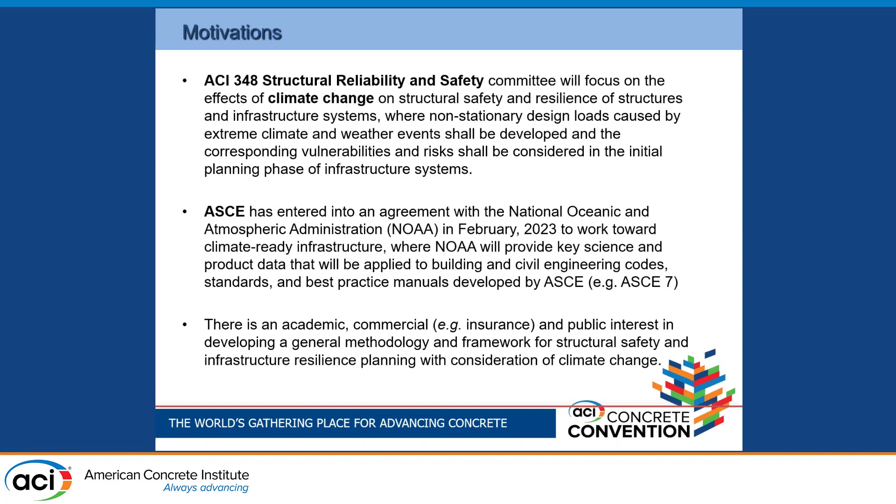Another thing I just mentioned is ASCE, American Society of Civil Engineers. Just last month, February 2023, they signed an agreement with NOAA to work toward climate-ready infrastructure, where NOAA will provide their data. So in the new version, ASCE 7 or other manuals will consider climate change. Currently, we do not have anything in the design code. Finally, there's a lot of interest in climate change and infrastructure resilience planning due to climate change. Basically, there's a lot of research funding, we chase that money, and we start from there.

So today's presentation: first, we talk about the coastal concrete structure, what we are talking about for my project, basically for the Navy. Also the damage of concrete structures by extreme weather, there's one slide. And we'll focus on the extreme design load in ASCE 7, basically the wind load, storm, and flooding. For structure-wise, we talk about the flow velocity because that will cause the damage of your structure. Sea level rise, of course, has been studied a long time. And then we talk about in the design code how we model the PDF, probability density function, and the load combination, with a very general idea. I'm not going to do the more detailed study.

And then the non-stationary climate change, because non-stationary means the historical data cannot be directly applied for future prediction, because with climate change, everything changes. And finally, I have two more slides on resilience and risk mitigation, and the summary, and one slide on the future need.

Okay, coastal concrete structures. We'll talk about buildings first; everybody works on buildings. And the parking lot and the road are infrastructure, network, or whatever. More particularly, for the U.S. Navy, we talk about piers and dry docks. It's a very important facility for us for the maintenance of aircraft carriers or submarines. So we are running into some issues. We are short of facilities.

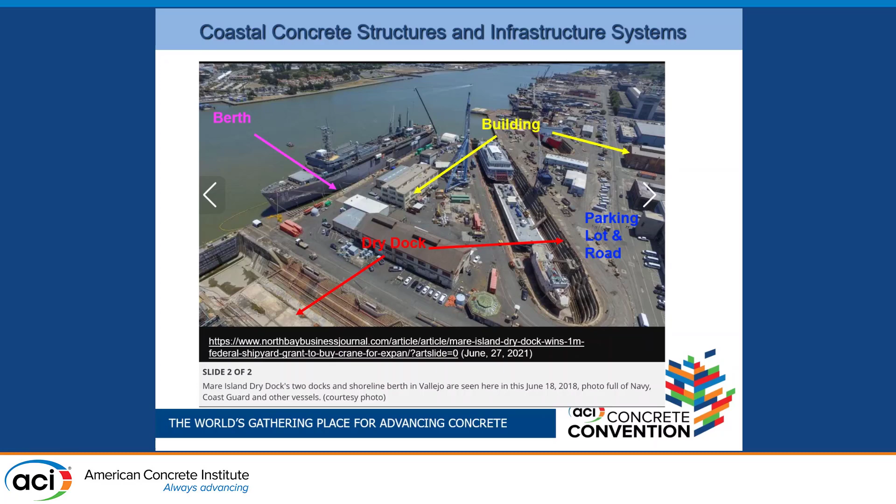I put the red mark, extreme water level. This is a very important design factor. And for our pier design or even the dry dock design, there's a specification. This is subject to climate change because it includes the tide, storm surge, and sea level rise. All the numbers will be included. This will be the focus of my research, to see how it's specified in the design code and what the current practice is.

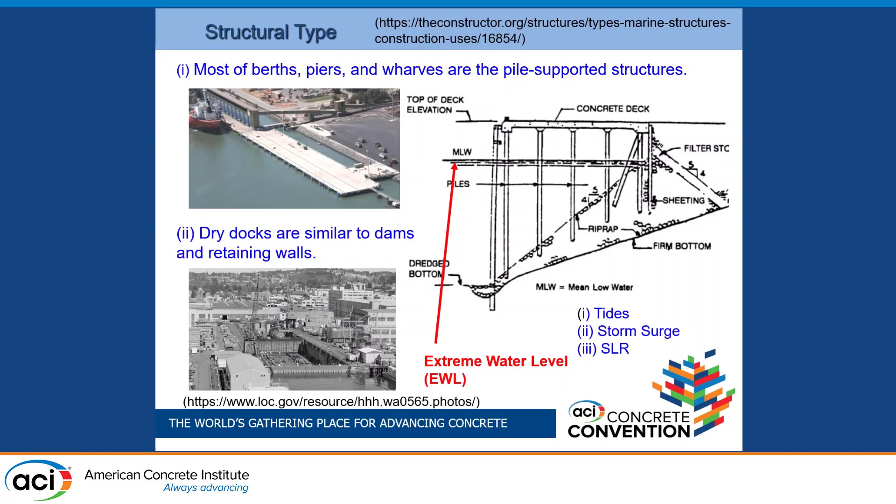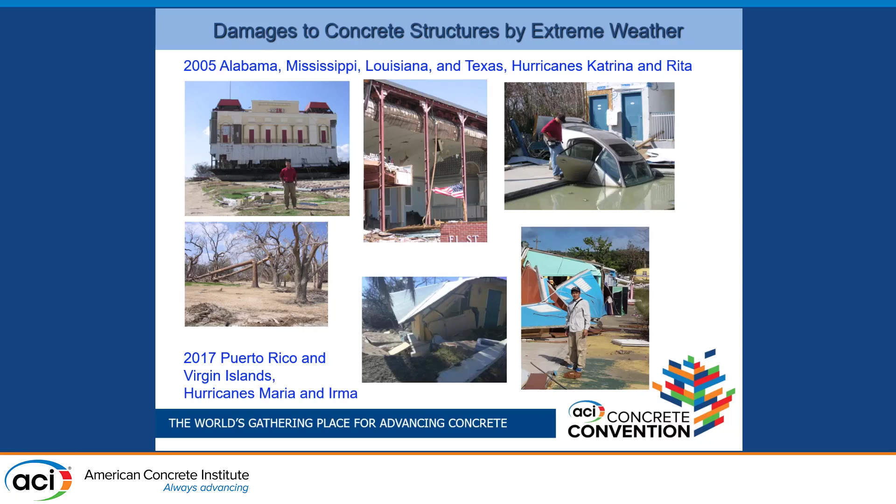Damage of concrete by extreme weather. You can find this online everywhere, thousands of photos, but you couldn't find these six because we took them ourselves. In 2005, almost 20 years ago, I was in Hurricane Katrina. I was there, that's the first one. And we have first-hand experience of how the hurricane damages structures along the coast, restaurants and residential or other apartment buildings. And in 2017, my co-author, Professor Yue Li, also went to Puerto Rico and did a survey of those damages. We're not going to go into detail on this one.

Right now, when you look at the coastal area, many people develop the probability of hurricane damage curve. You see the vertical is probability of damage, and the horizontal is the wind load. Basically, what's the maximum extreme wind load you have. Then you define your damage level. The first one will be minor damage, the black one, and the pink one will be medium.

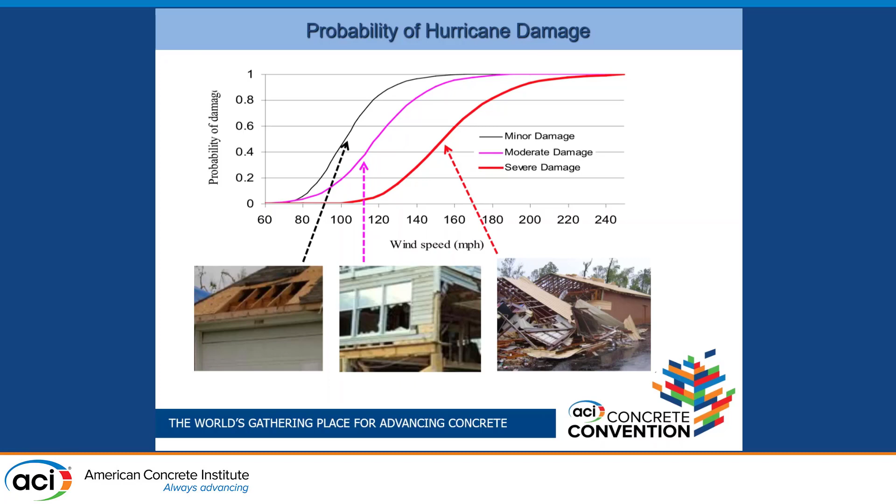It depends on your definition of a curve. For example, if your wind load, the max extreme wind load, is less than 60 to 80 miles per hour, you really don't have much damage, don't worry about that. If you're over like 160 miles, you probably get some damage. The degree of damage depends on the condition. Like Florida, the hurricane season is always around 140-180, that's a range. So we're not going to detail this.

We'll focus on the effect of climate change on structural performance. So what's the general temperature effect? Because we have buildings, you have expansion, the whole thing deforms, because extreme hot temperature in the summer and cold temperature in the winter, like in Alaska, will affect the deformation of your buildings. And the wind load, of course, that's the wind load and the hurricane, storm surge, that's blue.

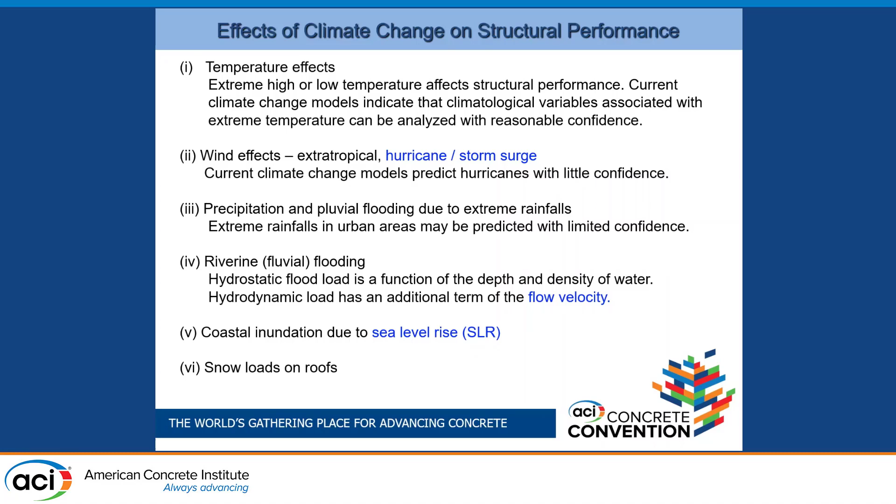Finally, as mentioned, the sea level rise and the snow load, this in particular in North Alaska, Northeast America, there's a lot of study by the U.S. Army Corps of Engineers, to see how those data support the future. Particularly, we'll talk about the climate change on the coastal concrete area that I mentioned, the piers and the wharf or the dry dock. First, there's the effect of climate change over two parts.

First, how does climate change affect your design load for piers? The sea level rise, give you an example, because we have piers at a fixed elevation. If water level goes up, you have the vessel. The vessel has a cable, we call it the mooring system, tied with the piers, the bollard. Did you see that? So the load transfers, because the vessel is moving, if you're in a hurricane, it moves much more. And so sea level rise gives the angle the difference.

They will change the loading condition. That's one. Increased wind and wave load, that of course is affected by climate change. And now the question is, right now ASCE 7 has a chapter to talk about tsunami. So if we design for tsunami, is it really satisfied with storm surge, because we don't assume this is happening at the same time, right? We design for that, just like we design for earthquake, it's good for the tsunami. So this is a question we need to answer, and in the design code, we do not have an answer yet.

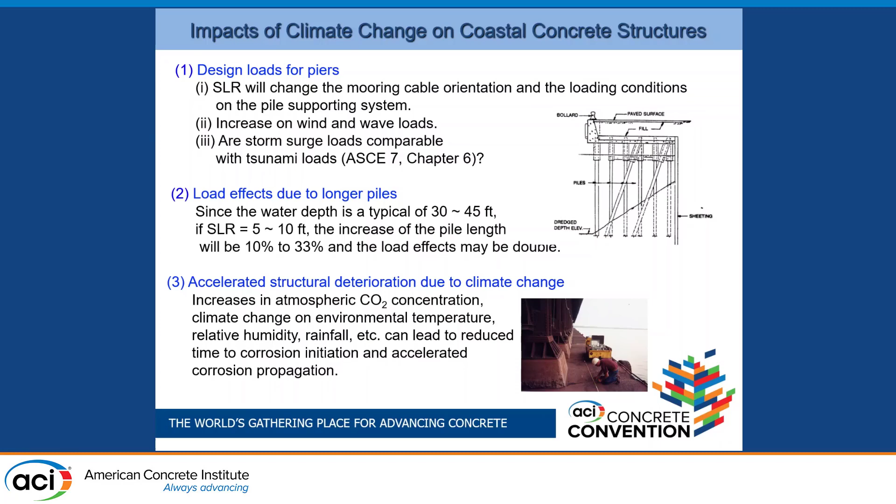So this briefly covers that. And now we focus on three parameters: wind and flow. Today's presentation is just wind and sea level rise. I didn't do the flow velocity because of time limit.

This is very similar if you have a structural engineer background. The left-hand side shows how you calculate the wind load, and all the parameters there. On the right-hand column, the extreme value one distribution, you're probably not familiar with that. That's behind the scenes, behind the maximum 50 years load, the mean value ratio coefficient, that's what we're looking for. The wind load statistical number is whatever parameter in your equation, we all look at the mean value and standard deviation.

So in the ACI 348 committee, we have a structural reliability background. We've been doing that for 20, 30 years. And that's all our work. Our end product comes out to the load combination, 1.2 dead load, 1.6 live load.

Most people don't understand where the 1.6 load factor for wind load comes from, and they misunderstand it. People say their wind load is much larger than the nominal, but it's not the same concept. That's why I want to clarify this, for general information.

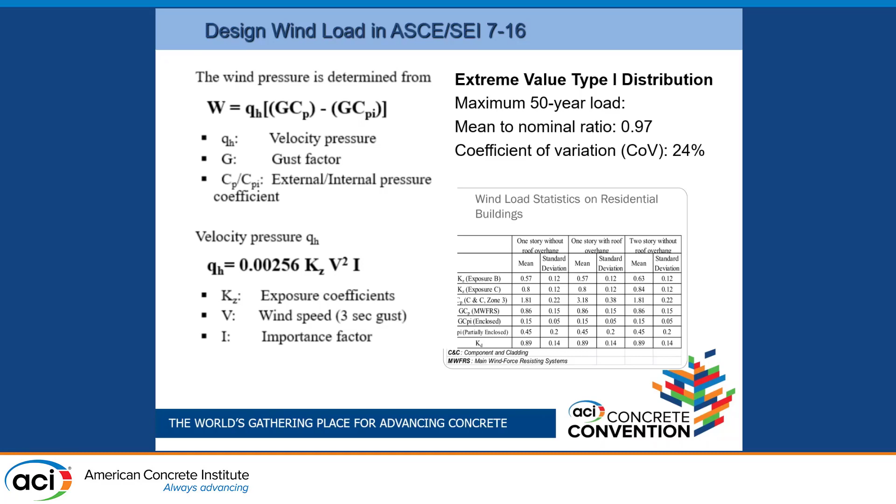This is the design note for each parameter. We have different data sets, different numbers from, look at the bottom, Australian building codes and other references. Different countries, even ASCE 7, we did calibration with ACI 318. This building code was calibrated by Professor Andrzej Nowak, who is in my committee and around here, back in 2003, about 20 years ago.

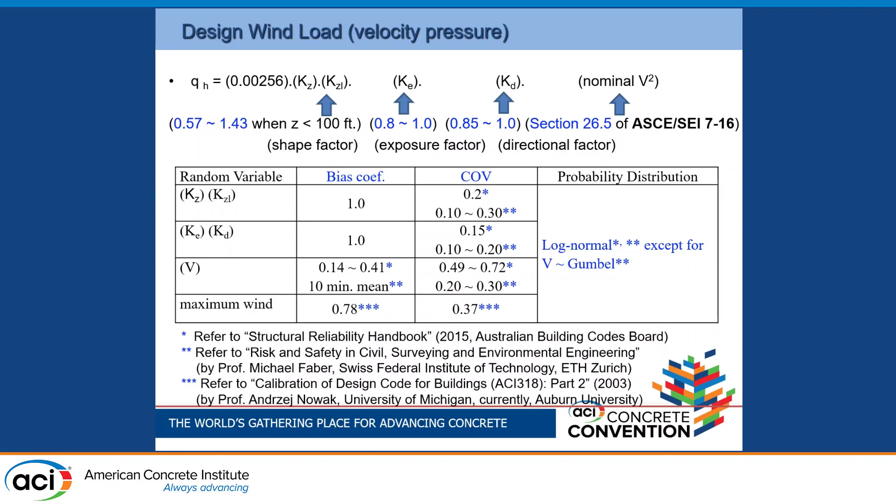So we do have the calibration for this loading, and we can do the order for the extreme loading part. This is just general, what we have today. Later on we'll talk about non-stationary conditions, what we're going to do for the future.

Now, extreme water level is very important. This includes tide, storm surge, and sea level rise. For tide data, we have NOAA - that's why ASCE teamed up with NOAA. They have years of data, and we try to use that data to figure out what the future weather will look like.

Storm surge has very large variation. These things may dominate your final result, but the uncertainty isn't happening every day - it's just a very extreme event. That's what we'll talk about.

And sea level rise, that's what we'll talk about next. We have different data from the IPCC code, the Intergovernmental Panel on Climate Change. They made 5 scenarios, which are good for controlling carbon emissions, and very typical when you do climate change modeling.

In those scenarios, you have global sea level rise ranging from 0.2 to 2 meters by the year 2100 - that's 90, 80 years from now, but they started in 1992. It's a huge variation. Once again, this is global - it's not applied to anywhere specific, it's just some model's global output.

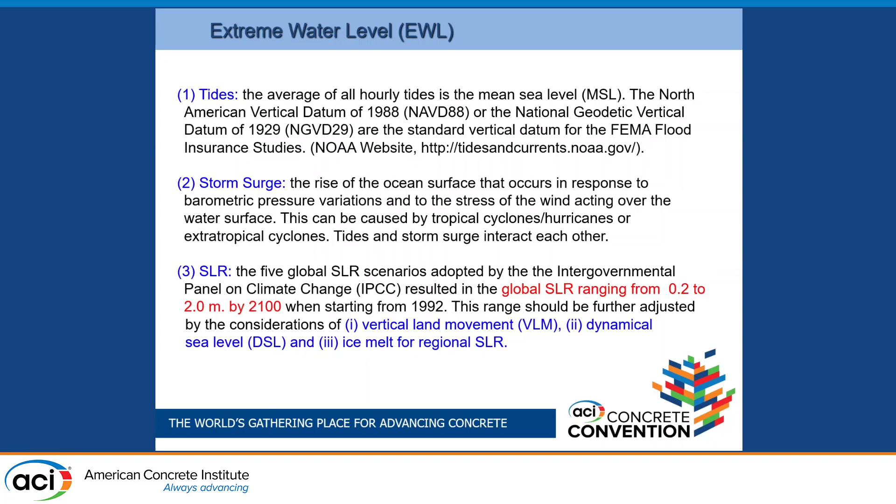U.S. Army Corps of Engineers has an online tool - I highlight this one. You can put in your location and they will tell you the sea level rise for that area. There's a lot of research behind that.

Now in practice, the UFC, Unified Facility Criteria used by the U.S. military, is similar to IBC code. In the National Building Code, we have a copy, but this code only applies to DoD standards. In UFC code, very simply, there are 2 methodologies. The first one, on the left-hand side, is where you see some level added - 2 or 3 feet, depending on the location. This is a super simplified level. How accurate it is, we don't know.

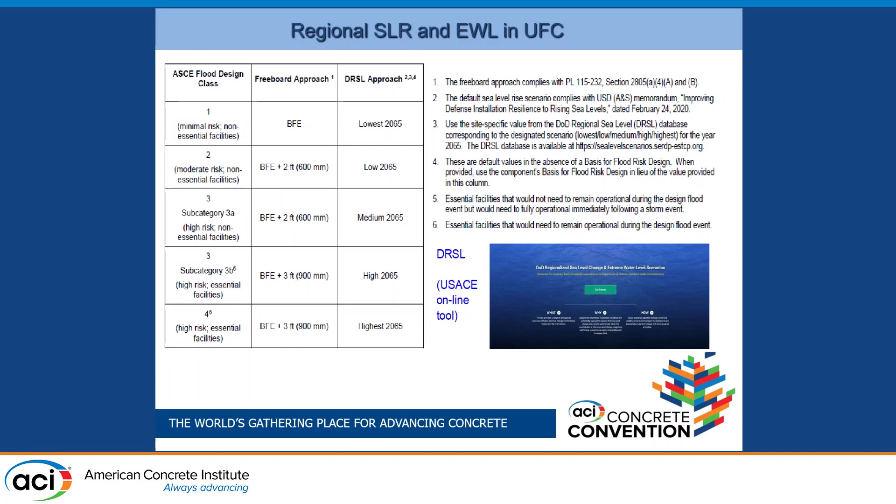Once again, I see the 2 meters is global - it's not going to apply everywhere. This regional aspect is very important because, for example, we have a shipyard on some island. In this island, the situation is different than the FEMA flood map, because all the assumptions are different.

So for the same island, another study - done by other people, not me - is the yellow one, YK-001, you see at the bottom. That covers 2 locations with the FEMA map. But we did additional points, T1 to T6, and came up with different numbers. We reported this to FEMA in 2017 and got approval. So in that location, particularly the shipyard, we can use those lower or different numbers.

So the bottom line is don't just take any number from the FEMA map. Of course, for simplification, you can take it, just like a seismic map. But for a particular case, if you want to do better for some reason, you have to do the additional work. Regional effect is really, really important.

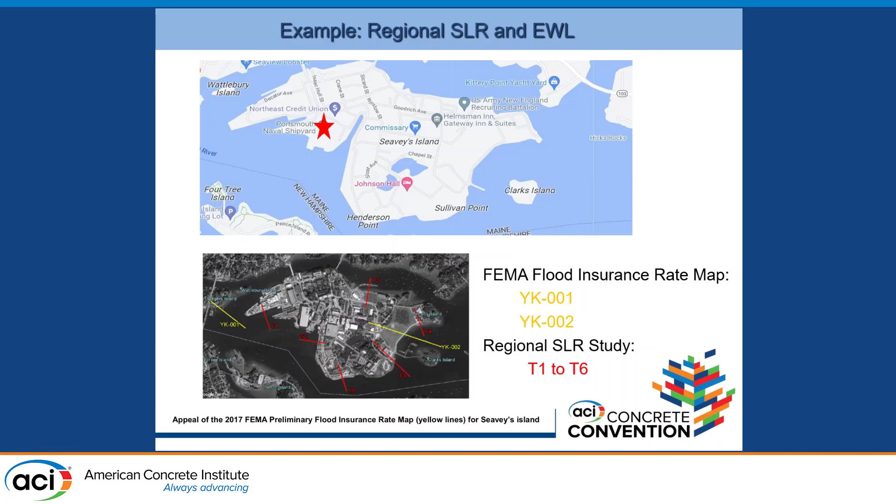You will change everything, particularly this is an island. The island because of water around it. It's not a FEMA model they're looking for, the detail about that.

This slide is about load accumulation. This is a general rule about load accumulation, and it's used to be in the ASCE 7 code since the 1980s. Everybody right now has a different methodology, but we don't use it. Current design code, ASCE 7, uses this one.

I want you to focus on the figure, not the equation. So that load is always there, and then we have a live load.

The second row is transient, just impact, whatever, and the sustained live load, like a floor load. Did you see the horizontal time during the life of your building or structure? And the snow load during the season, daily, weekly, and in summer there's no snow.

Earthquake only happens occasionally, I don't know how many times. I want to pay attention to the wind load. The wind load will be happening multiple times.

And with climate change, we're going to see a different distribution. How the frequency-wise and intensity-wise will be different. Since that's the case, we need to look at how to do the load computation.

Currently, as a structural engineer, you remember the load combination. The first one is 1.4 dead load, nothing else. The rest of them are 1.2 dead load plus 1.6 times some live load. We call that the live load - if it's the primary load we consider, it gets 1.6, and the other one will be smaller.

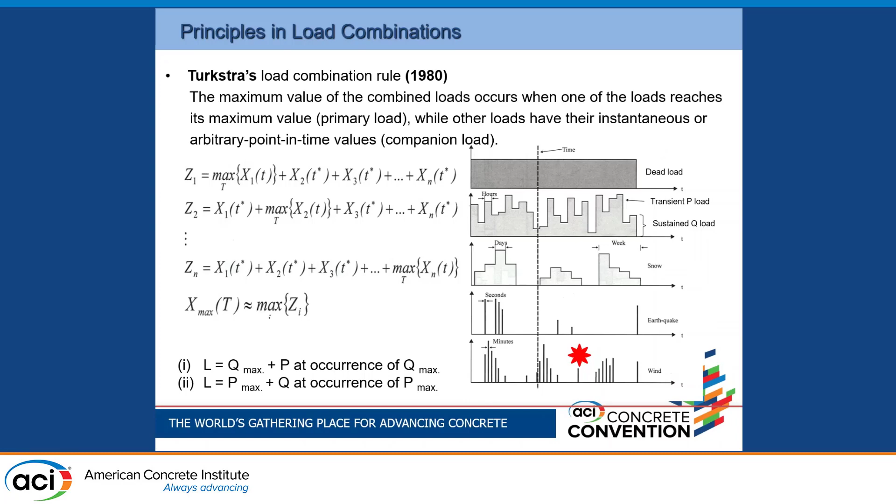Now we move into the effect of climate change on non-stationarity. For storm surge, non-stationary means historic data cannot apply to the future. You must rely on a model, either a physical model for climate change or a statistical model for climate change. It's also regional, localized.

I don't want to go into the detail. I just want to mention that storm intensity is a function of sea surface temperature, because we assume sea surface temperature will increase in the next 100 years. Right now it's 2 degrees. This increase will affect storm intensity and frequency.

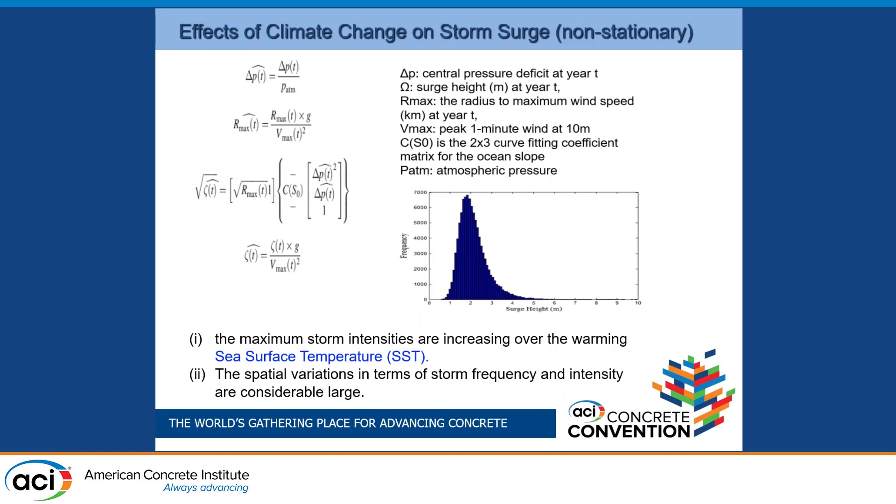And also there's spatial variation across different islands. When we talk about the Pacific islands, the differences - I have some plots I'm not going to present here because it's not my work, it's from another reference. You see different islands have different things - frequency-wise and intensity-wise, it's going to be different.

Now we move to see how we're going to model this non-stationary stuff - extreme value analysis is a very powerful tool to deal with what we're talking about. First question is which data we're talking about, which extreme value data.

We have two methodologies. One is called block maximum - annually, daily, or monthly. Did you see, year 1, we just take one maximum, doesn't count other things. And year 2, just another number.

Another methodology is called peak over threshold. We give a threshold, anything above it we count. So this may have multiple numbers from one year and zero numbers for another year - doesn't matter. Anyway, these are the two methodologies for how you get the data.

Now the function, the probability function called the generalized extreme value, GEV, is standard - if you go to the probability class, you'd learn this. This particular function has 3 parameters that control it.

Normal distribution only has 2 - mean value and standard deviation. This particular one has 3. One is the locator, which means where the center is, and another is the scale parameter. These two are similar to a normal distribution you're familiar with - we have mean value like the locator, and scale value like the standard deviation, like how narrow or broad, the uncertainty we'll talk about.

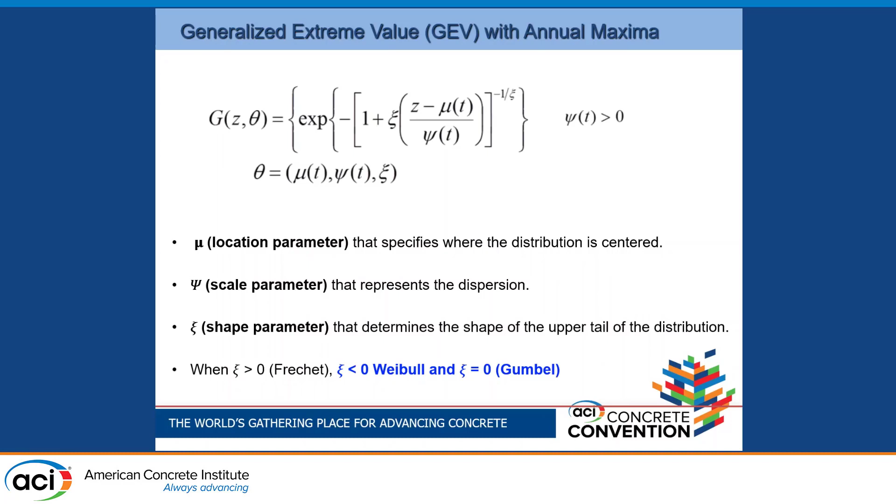So the value of data, we have to be careful. We just say we have a lot of data, but usually for extremes we don't have data. There's very little data we talk about. So this is a general equation. When you have xi less than 0, it's a Weibull distribution. People are probably familiar. If xi equals 0, it's Gumbel. Those are two very common distributions we deal with.

Now, what are we going to do about the non-stationarity? Right now the current methodology is very simple. Put your location parameter as a function of time, a function of the temperature. You make it a variable. So this is the report. The location function considers the seasonal difference, tidal cycle, different locations, long-term climate variability. It's a bunch of these things, and the scale factor as well, because location controls your central point and scale the dispersion. Those are two important things. However, the shape function is kept constant.

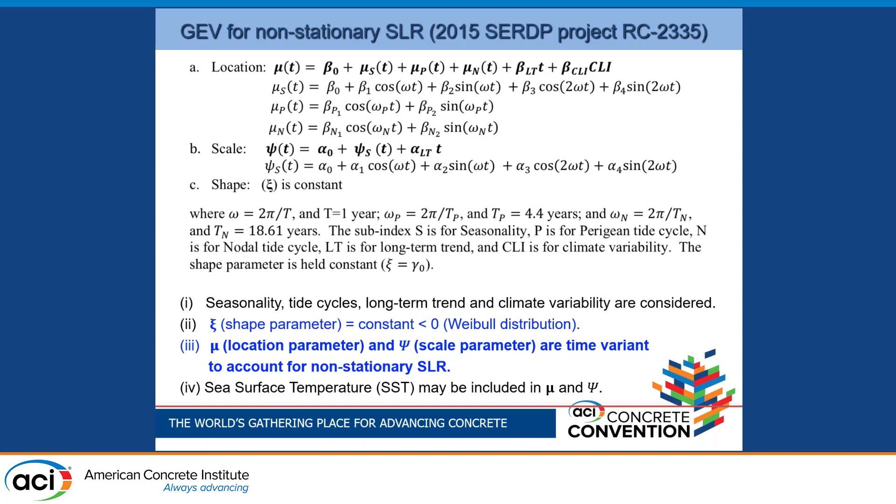Is that true or not true? We don't know. We don't have the extreme tail behavior. Right now, so far, it's constant and also it's negative. So that was the full distribution. Once you put this in, you can deal with non-stationary data. I won't talk about the details of this. And then you talk about sea surface temperature, that is also part of the foundation.

Okay, resilience. Now we talk about resilience and mitigation. For the piers, I'll just give you an example. We can permanently relocate this pier because of sea level rise. Or increase the pier deck, or increase it 2 feet, 3 feet, no big deal. I'll talk about it on the next slide. And also, we do some structurally smart ideas. I will show you on the next slide as well. And the uplift force will be through your surge.

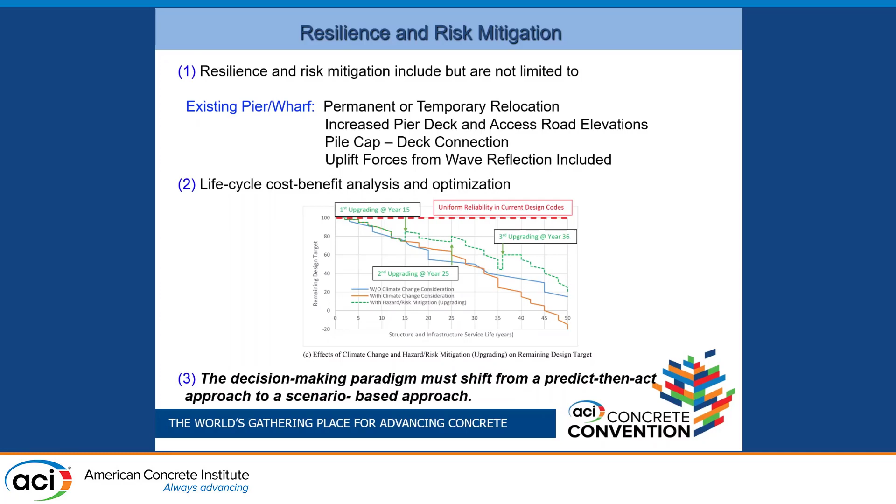The second step, of course, we do the life cycle cost analysis optimization. This is very standard. If you do the maintenance every 5-10 years, what's the cost of that? It's very general. It's not practical right now. I will make a conclusion about that. By the way, this very new concept is decision making. Right now it should shift from predict-then-act to scenario-based, because we talk about extreme scenarios. Which one we include, which one we don't include, how we're going to do that. That's an example I will tell you.

Resilience mitigation. The first one, people think: raise the deck. Raising the deck seems like nothing, but actually it costs a lot of money. The shipyard says if you reduce it by 6 inches, I can save $1 million. It's a simple solution, but it costs money.

The next one is the connection. Did you see the damage? This is tsunami damage. If we design to keep the pier and let the deck float up, we reduce the load from the wave load or wind load. You keep the pier, you can reduce those things, and then redo the deck. That will be much simpler.

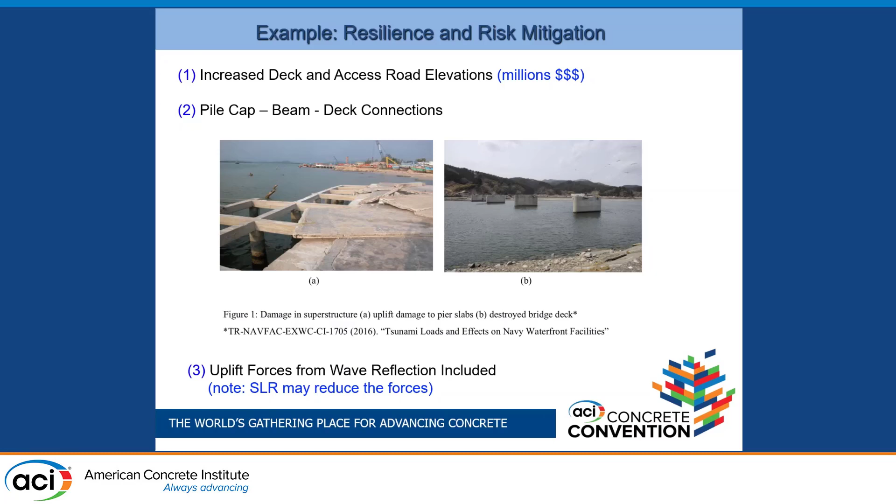And another one is uplift force. Include it in your calculation to resist that. And this one I want to point out: sea level rise may reduce it, or maybe do good things, because your clear space is shallower. So it's better. So once again, climate change will not always do bad things, some do good things. It depends on what you look at.

So this, I think, is the last slide, the summary. Extreme value analysis is a powerful tool to deal with non-stationarity. That's what people are using. I'm not getting into the detail of which particular one. 2 of the 3 parameters will be time-variant, and how accurate that is, I don't know. And the sea surface temperature can also be included to quantify this scenario, the non-stationarity.

Once again, regional, local things are extremely important. Otherwise, you mess up. You can get a number, and the number will reflect what you have. Then once again, ASCE 7 will have new things come out in 2025 and 2028, and we follow ACI 348. I'm sure I will follow it with the kind of connection I'm working with.

So finally, infrastructure resilience planning should be based on the life cycle cost. Of course, everybody understands that, but it's very difficult to quantify. With structural design, we have to specify the load combinations. Infrastructure resilience planning is very difficult. I asked people around, and people do it their own way. Some top-level people say they think we can do it. In reality, nobody does, because your goal is different, your time frame is different, everything is different. I think this is very general.